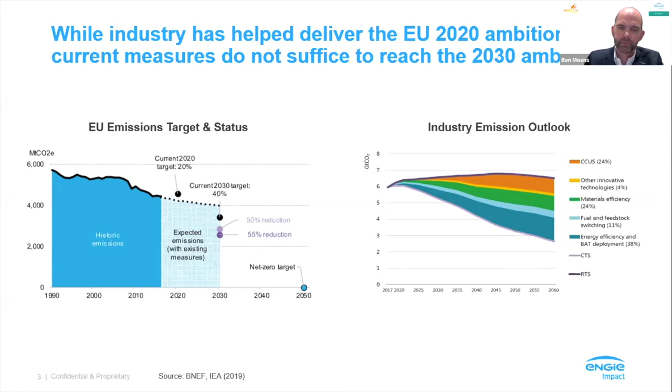Now, for industry, there are obviously a bit of challenges related to reducing emissions, and we can basically sum them up in three things. First of all, some sectors just have inherent process emissions - you see some graphs here, cement 60%, lime industry, aluminum, and certain chemical sectors as well. So there are certain parts of industry that need different solutions to decarbonize.

In essence, what we have to move to are solutions that create circular carbon loops and basically find a good use or a good storage of these inherent process emissions. So circular carbon will be a key solution to look at in the coming 10 years.

Secondly, there's obviously the heat requirements. A lot of processes will require high-grade heat, like more than 400, more than 1,000 degrees. You see there a graph that clearly shows that the total energy consumed in these high-grade processes is a really major contributor.

A lot of the green technologies in the pipeline simply will not reach these high-grade temperatures. If you look at industrial heat pumps, you can probably crank it up to 200 degrees. Same with geothermal, probably 300 to 350. So it means that in the end you need green fuels, molecules that you can still burn in your kilns and ovens. There's clearly a need to make a shift to create that green fuel portfolio.

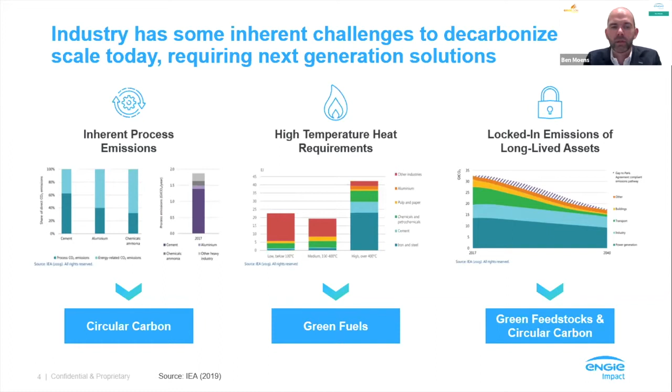In essence, there are four domains I will discuss with you. First, there's a question of what's a realistic cost-down path of some of these technologies, and how, as an industrial company, can you weigh in to make sure you get a least cost pathway.

Second, we look at some cases of new forms of collaboration that are emerging around this topic of green fuels and feedstocks, and see what that can mean for you as an opportunity.

The third one is looking at your asset strategy, and there come some examples of how you can adapt your asset strategy to make sure you can evolve your existing asset base according to your pathway.

And then lastly, obviously, a major question is how can you make sure all of this gets funded?

Let us start with the cost topic. The major first recommendation is that what you should be looking at today is really having very good insight into the cost dynamics of some of these new technologies. If you look 10 years back, we have to admit we've been systematically wrong on assessing the cost, for instance, of renewables. We've always overestimated the cost and underestimated the adoption rate of renewables. There's a risk that we will do that again with some of these new technologies.

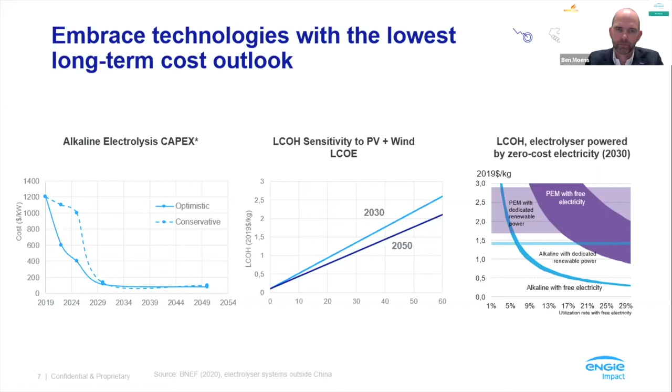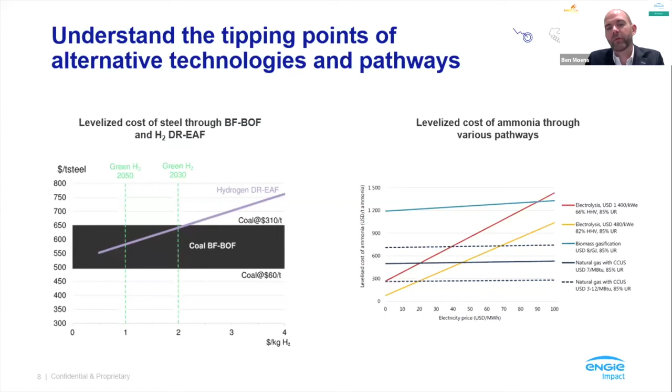So this is important for you, as an industrial. If you have some of these applications or opportunities, connect well with some of your peers and really understand what's happening in terms of some of this shared infrastructure.

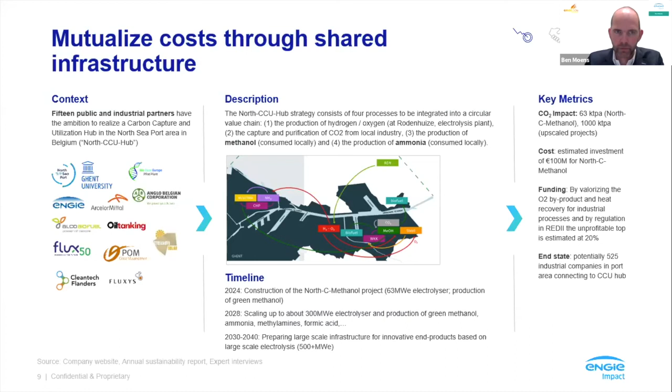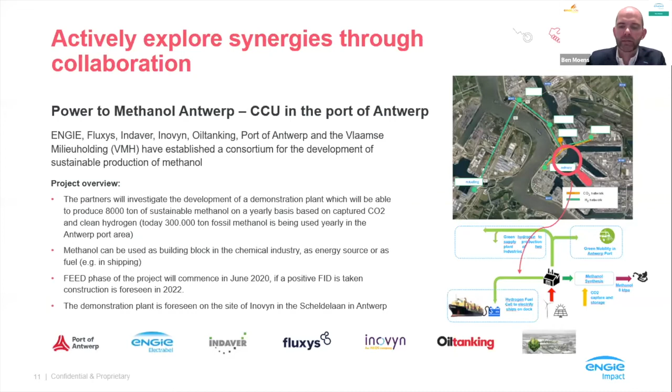That is really an excellent example where, as you start to shape your decarbonization pathways as an industrial, you look at that collaboration potential, what are some of the dots you can literally connect with neighboring companies, and in that process try to mutualize and jointly invest in some of these new technologies. It definitely de-risks a lot of that journey.

Another key one for industrials to think about is that the future infrastructure and future energy needs will start to converge more and more the world of energy actors and industrials.

One example here is for a lime producer that has a lot of inherent process emissions. We as Engie are actually building the electrolyzers, as well as building a methanation installation, and in essence provide that lime producer with a supply contract of e-methane, synthetic methane, based on their CO2 flow and our produced green hydrogen.

So it's a setup where we as Engie basically assume a lot of the operational risk and also financial risk of such a project, and in that sense drastically de-risk that decarbonization journey for that lime producer.

This is now a momentum, a change, an evolution we see happening with a lot of industrial players, and it's really something to clearly think about: what are the contracting models, what are some of the future partnerships you will need to realize all of the investments required to move to these green technologies.

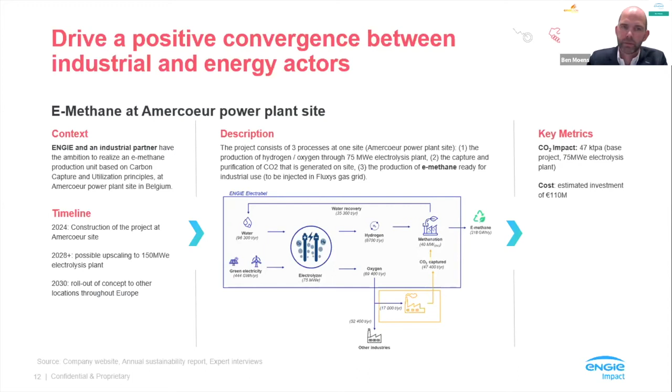Moving on to your asset strategy, I think one critical point, given that lock-in I was talking about, is that you should reflect on how you can create a dual asset strategy. There's a very good example here of ArcelorMittal, which just published their climate action plan, so it's accessible for all of you.

Of course, the steel industry, especially in Europe, has traditionally been based on blast furnace, and these are long-lived assets, more than 40 years. So you need to find solutions on the basis of that existing asset base.

What ArcelorMittal has done is start already exploring, over the past 5 years, a lot of new technologies around CCU, biomass, pyrolysis, etc., to basically replace coal by alternatives. They're also looking at using hydrogen directly in the blast furnace to replace some of the pulverized coal. In essence, they created a whole smart carbon production route that for them is a critical piece to enable the transition on their existing asset base.

It has some advantages in that it also creates byproducts, and the slag can be a good alternative to cement. They will also produce significant amounts of bioethanol, which can be a feedstock to chemicals. They calculated that this is for them the cheapest production route, but not necessarily the most logical or sustainable one, because you still have a lot of CO2 emissions that you have to capture and either store or convert.

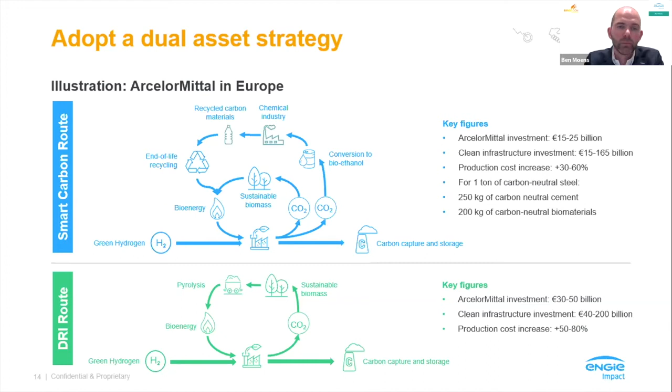So it's kind of a dual speed asset strategy, which I think is a good archetype and illustration of what a lot of industrial companies should do: considering how, on one hand, they can build a clean pathway on their existing asset base, and at the same time create a whole new clean pathway for all new assets to be built.

There's a second important element about your asset strategy, and that's really, when you reflect on that, is to design for modularity and flexibility. Why? Again, you want to make that transition as smooth as possible.

Here's one illustration based on a conversation we're having with a steelmaker in Australia, where we help them find a design that makes that transition much smoother. What you see on the left-hand side is what I just described: the DRI process, where renewables are turned into green hydrogen through electrolysis, which then feeds a direct reduced iron production method.

That's the standard technology setup that most steelmakers are looking at to fully decarbonize. But what we introduced was the notion of not feeding the hydrogen directly into your DRI system, but including a methanation step. So you can still use your DRI installation on the base of natural gas, continue to do that. We will tap into the flue gas of the DRI installation, and with the calcium loop, make sure that we can capture the CO2 and combined with the green hydrogen, make e-methane, synthetic methane, which you can perfectly blend with the methane coming from the natural gas grid.

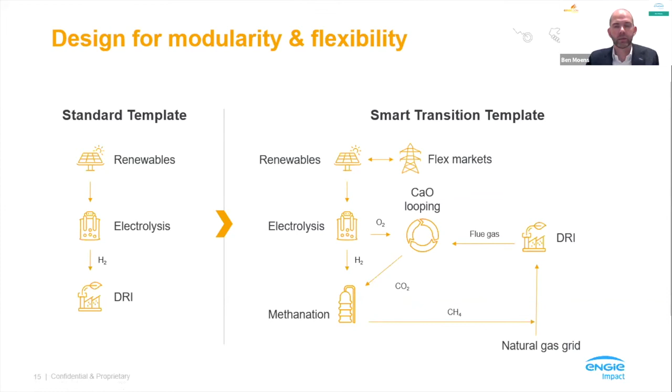And then lastly, and most importantly, the electrolysis and methanation step you can build up very gradually in a very modular approach. So you can easily spread that whole investment over a couple of years and more gradually turn over your asset base to, in the end, be 100% synthetic methane based.

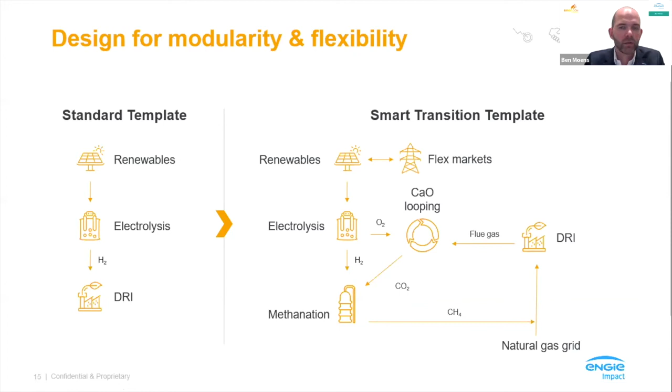That's a clear example where it's important to reflect well on your asset strategy, the type of solution you go for, and really maximize that modularity and flexibility.

Last thing is on bridging the funding gap, where first of all there's a question on your initial steps for some of these technologies. What are some of the funds you can tap into?

I'm not going to go too much in detail here since it's well known by this audience, but obviously there's the ETS Innovation Fund, where if you're not applying yet, the closure of the first call of 2020 is end October, but that's a clear one that can provide you a lot of funding to really move pilot projects to more industrial scale.

As part of the European Green Deal, there's now a first call launched under Horizon 2020 with a deadline of end of January, with around 11 area topics and a lot of potential for industrials to look at circular carbon and clean energy. Definitely an area to look into.

And then lastly, as part of the recovery package, there's also an expectation, still to be clarified, that through the member states, a lot of the more than 600 billion will also flow to green transition related projects, and that industry will also be able to benefit from that.

But next to the funding for some of your pilot projects, there's the question of the longer term: what about the business model, the business case, how to make it work. I think there are three important elements you need to anticipate.